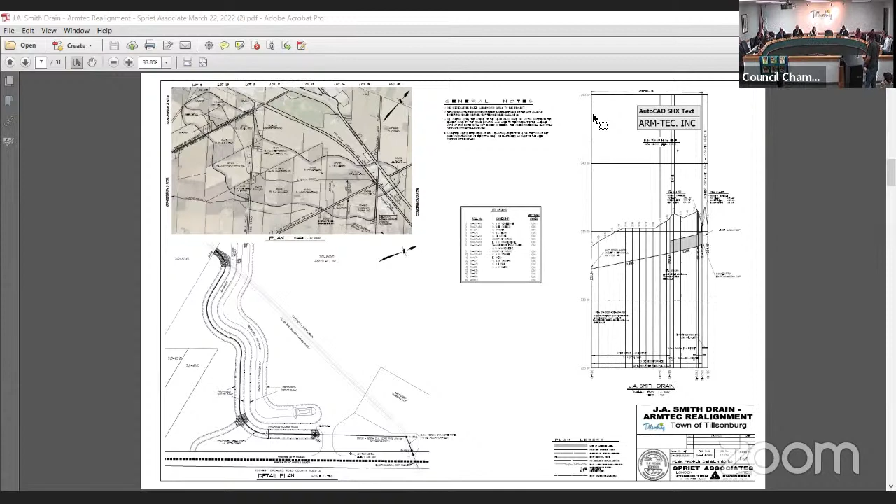As long as council knows my concerns, and I don't have to come back to it. I believe council is well aware of those. Thank you, guys. Thank you, Ron. Okay, any other questions from members of council?

Councilor Rosehart? Thank you, Mr. Deputy Mayor. I guess I'd like clarification. If we approve the drain where it is now, I guess that concerns the trees along the drain that are going to tip over. So I'm a little confused. Cephas, can you explain where we are right now as far as the work that's been done compared to what's going to be done with this drain?

Yes, thank you, Deputy Mayor, members of council, through to Councillor Rosehart. The concession granted, as alluded to in my report at the last meeting, has been that we granted 5 meters from the property line for the fence to be placed. Further to that, it's another 1.5 meters back, so 6.5 meters before the actual ditch is dug. I think the center line of the ditch is actually a bit further away than I thought. So we believe the buffer that has been provided and agreed to is sufficient to not negatively impact the trees. That's our belief, and certainly that is the concession that has been granted.

Mayor, can I address this to Mr. Canchild then? When I went there, the tree roots where the drain is dug are bare. So half of those tree roots are already in open space, there's no ground. So as Ron was saying, those trees will fall over. Then there'll be absolutely no buffer along there because it's right by his property line. So I guess that's my question: are those trees going to fall over if that stays where it is? Is that right, if I approve this drain?

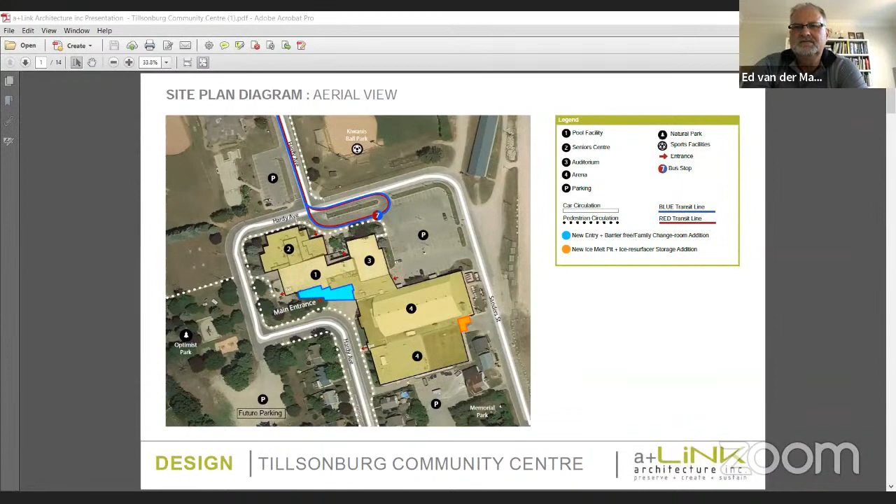Is this slide 2, please? Yeah, so this is a lower level floor plan which identifies scope of work. We have a new entry with change rooms and lobby. We have an existing pool, which we're doing deck resurfacing and a barrier-free pool ramp. We have the existing change rooms and pool office renovations, and the health club has some renovations as well. The new ice melt pit and resurfacing storage area, I think we're tabling as a future project to meet the budget assigned to us.

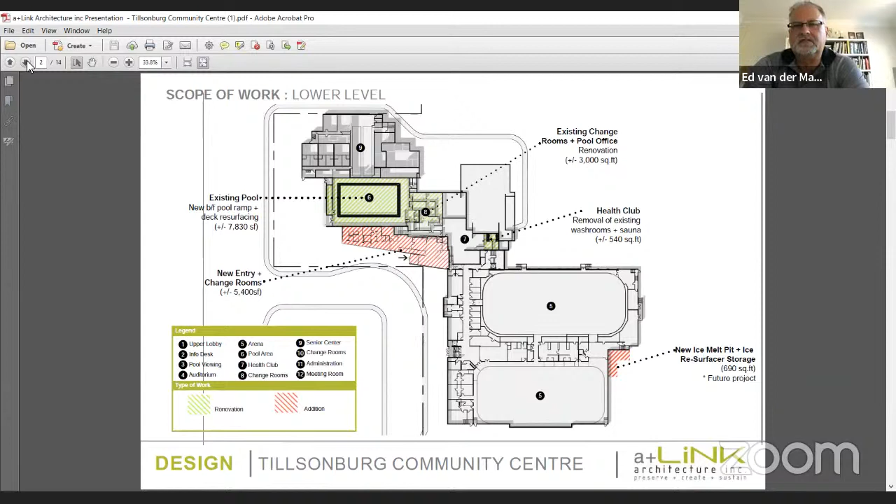After going through revised analysis, post-COVID analysis - so I'm not sure if we're post-COVID, but we're getting there. Next slide, please. This is a diagram of the upper level. There's existing pool viewing that we're addressing, accessible pool viewing we're entertaining in the renovations, a new entry with change rooms, and we're looking at admin offices and the customer service desk area.

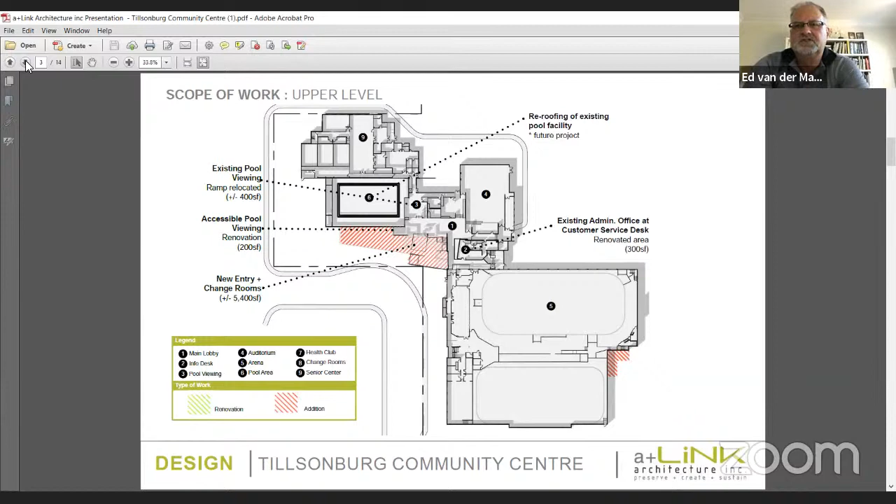Next slide, please. This is the upper level schematic. You can see the accessible pool viewing. We have some minor revisions just north of that with the ramp area and the office area. We have a meeting room, we have an upper lobby. You can see how the elevator and the stairs are accessing, and then we have customer service renovations. So next slide, please.

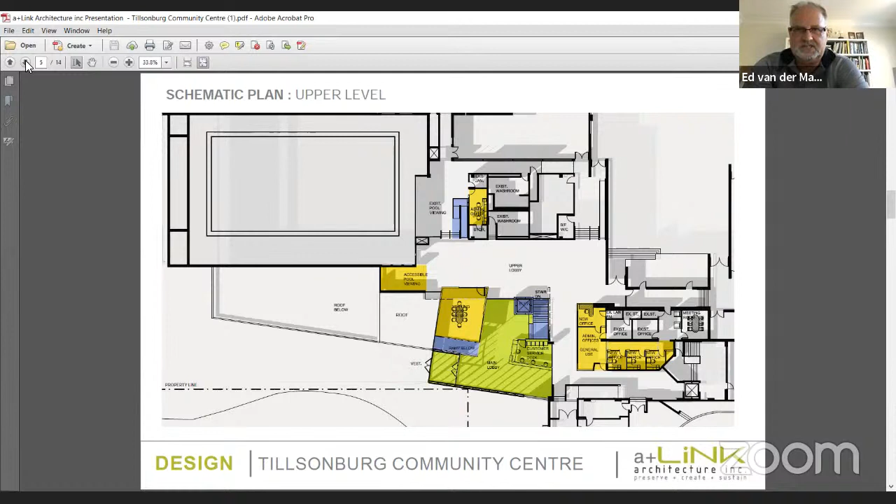So we're introducing some updated renderings, entering design development. We try to take our schematic massing plans and improve upon them in terms of materials and feel. This is the actual location where all those stairs are right now - we're obliterating them so we can actually have a drop off and access. Next slide, please.

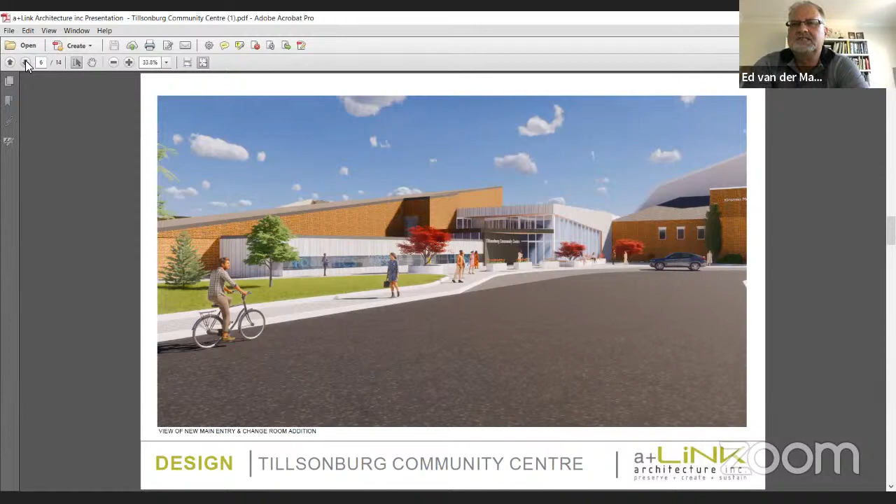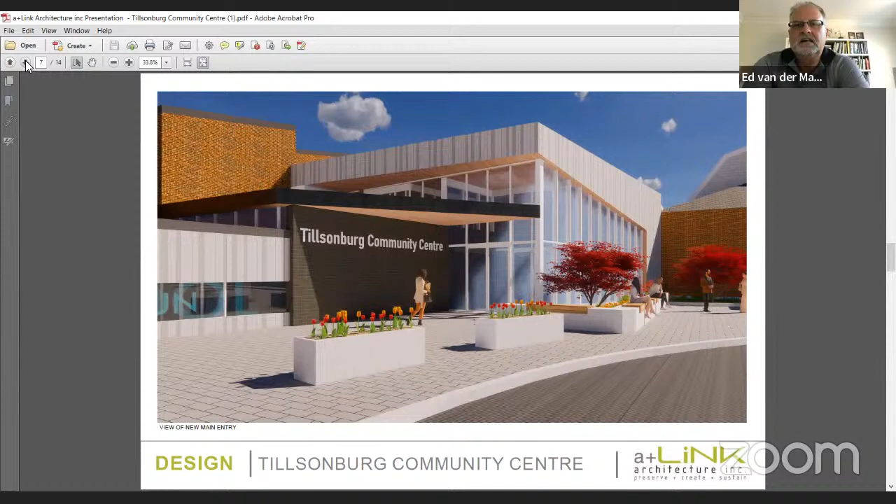And with some signage and some graphics to show you where the entry is, and some landscaping, some seating area along the edges. And to bring in a lot of natural light into the space.

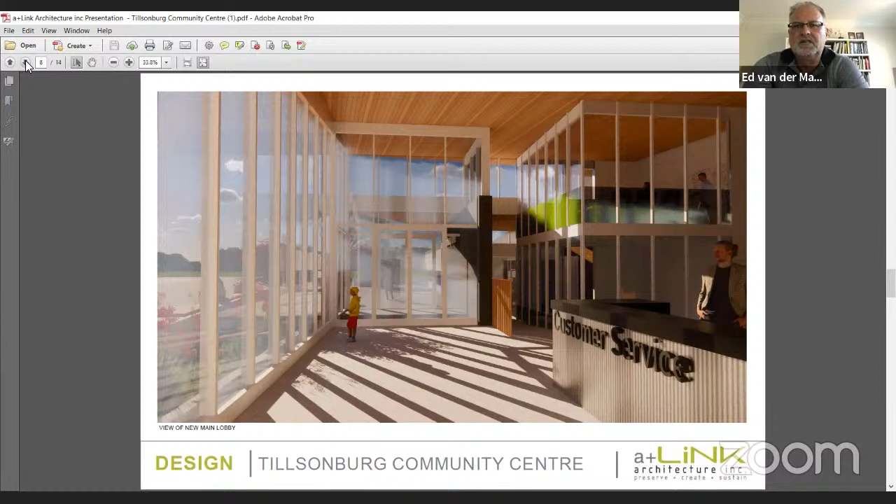It's really predominant in a lot of the recreation centers we do. So you can see this is from the customer service location, looking back to the entrance door, out to the glass on the left is towards the drop-off area.

And this is the upper level. We're trying to open up the building, existing buildings, so there's a connection from the lower to upper and brings light across. And you can see meeting room of the new addition across the way as well.

In the center there is the access down to the pool change areas, and when I say down, it's via a ramp, to accommodate a nice slope and accessible to the pool level, because there are so many levels in this facility that we discovered early on.

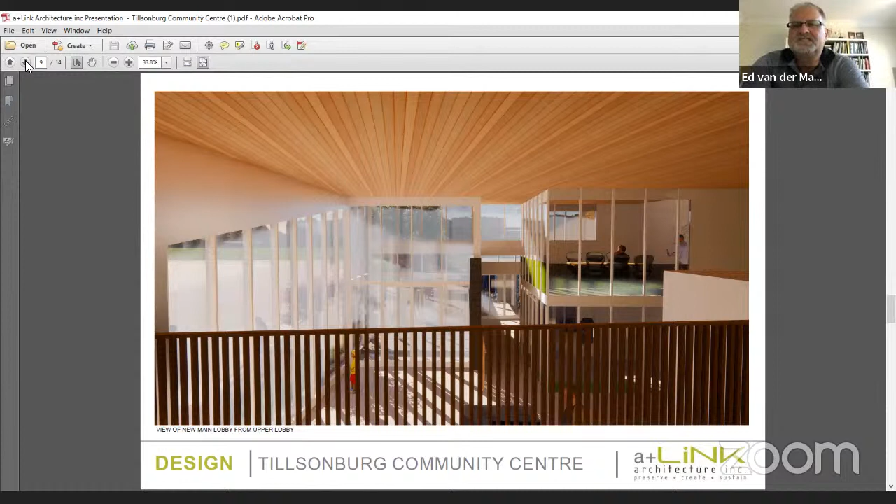Showing the customer service desk, we have some pattern of tile. We have the railing looking into the upper level, which connects right around to the right. So you can see how we're exposing the existing building.

We're using the elevator shaft not only to get us up to the upper level and down to the lowest level, but also using it structurally at a point. And then just to the right of that elevator, we have a set of stairs that we're introducing as well to bring you right adjacent to that elevator shaft.

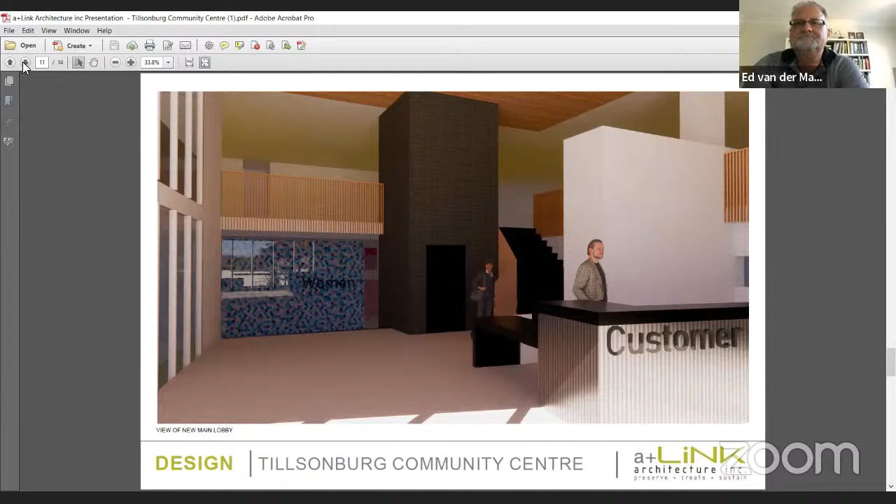And so, yeah, just bringing some seating area, some meeting area. This is the upper level. Just to the right is the shaft, and also the barrier-free viewing is beyond there, and some meeting room space.

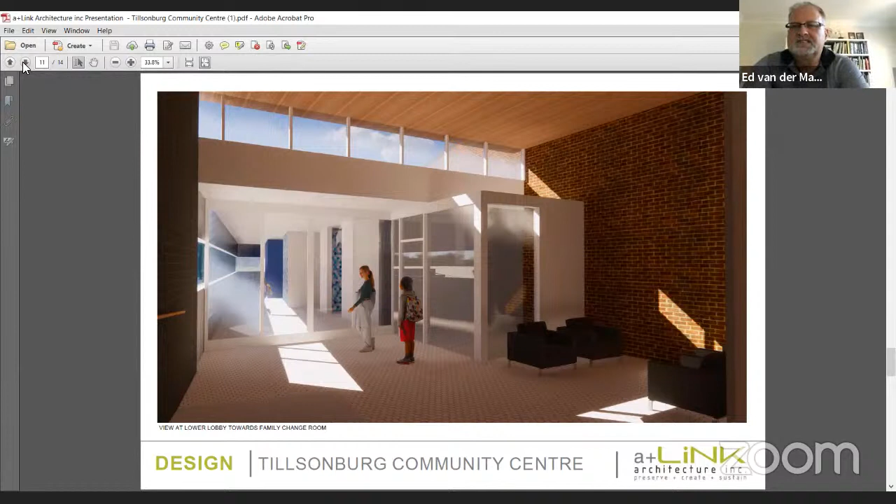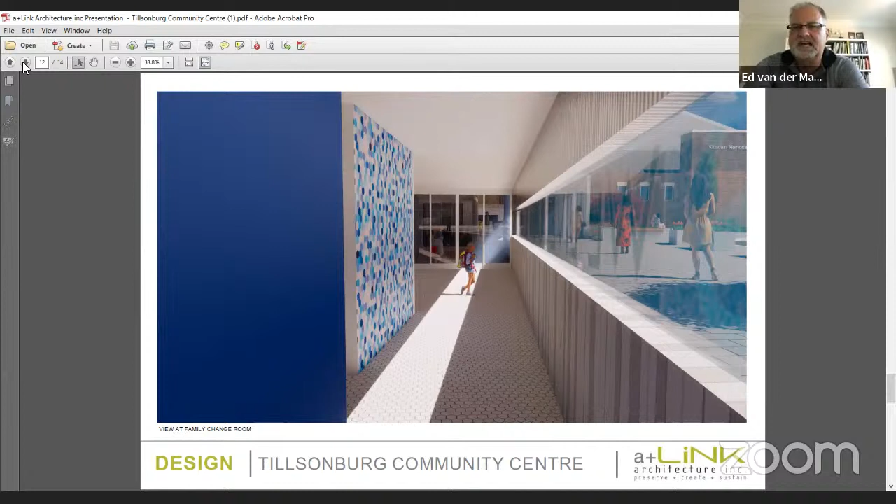This is, you can see to the right, the exterior of the building where the entrance is, and we're trying to bring light into the change room area, which is gender neutral, across to the pool. We like to bring these patterns into the tile as well to brighten up the spaces. But you can see how open and connected it is from inside to outside and connecting the existing pool.

And just a close-up of one of the change locations through to the pool, how bright it is, some of the materials we propose to use.

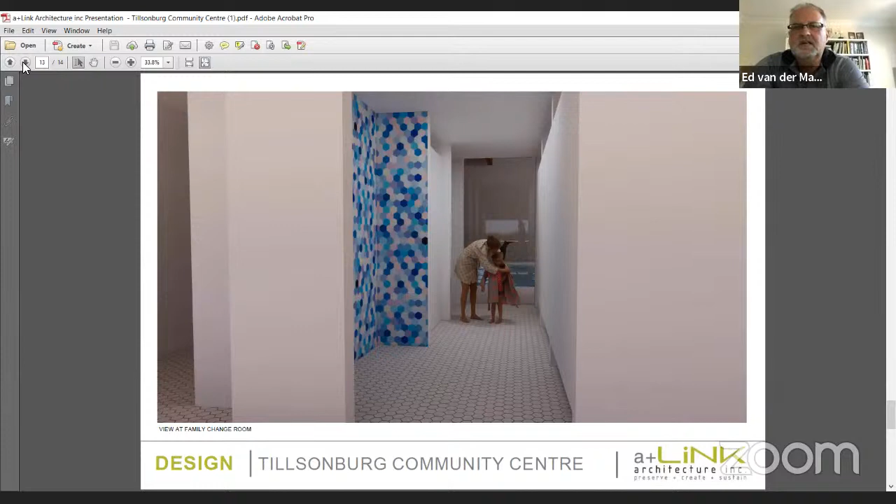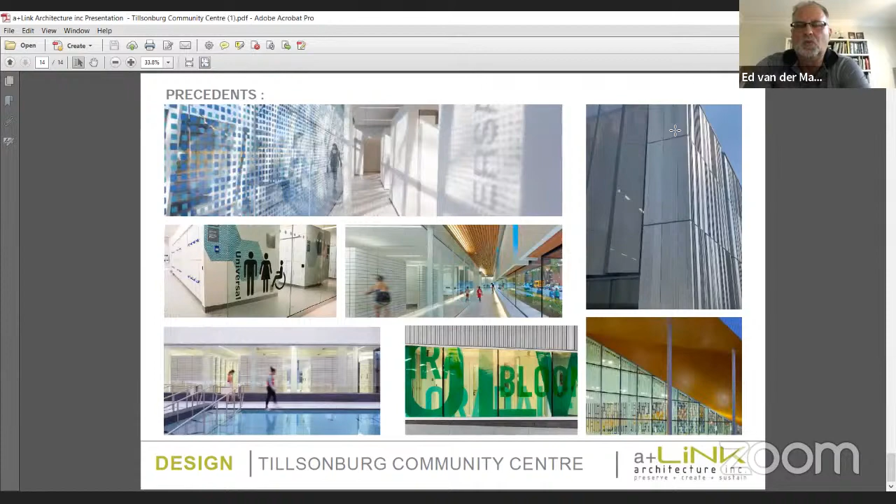Oh, I guess that's the last slide. So that in general is the updated presentation. We've been working on this for a number of months with the cost consultant just to make sure that we're aligning with the proposed funding that was provided. And so that's where we're at. It's not as exciting as drainage, but I hope it was enjoyed by everybody.

Well, it's a lot prettier than a muddy field, I'll tell you that. It's very well done. Thank you very much for that. There's quite a bit of information here, and it looks great. I'm sure that members of council might have some comments or questions on it at the present time.

But prior to that, Mr. Baird, do you think would you like to make a comment? You've been working with these people for quite some time. I'd like to know things like the cogen with the energy levels and whatnot. I'm sure you've discussed some of those technical details, and I wonder if you might shed a little light on this, on your comments working with these people.

Thank you very much, Deputy Mayor and Council. We're really excited to get to this stage. You recall we saw some earlier designs that Ed and his team put together, working closely with Dave and our other colleagues in RCP. There was a bit of blue skying, exciting just to be able to come up with some renderings. The challenge, as Ed has mentioned, is when we originally made that grant application, it was 2019. The world was a different place, and we know now it's 2020.

How far the dollar goes, and the ability for contractors—if we've tried to do anything on the home front, finding qualified contractors that are willing to provide a competitive bid is proving to be very challenging.